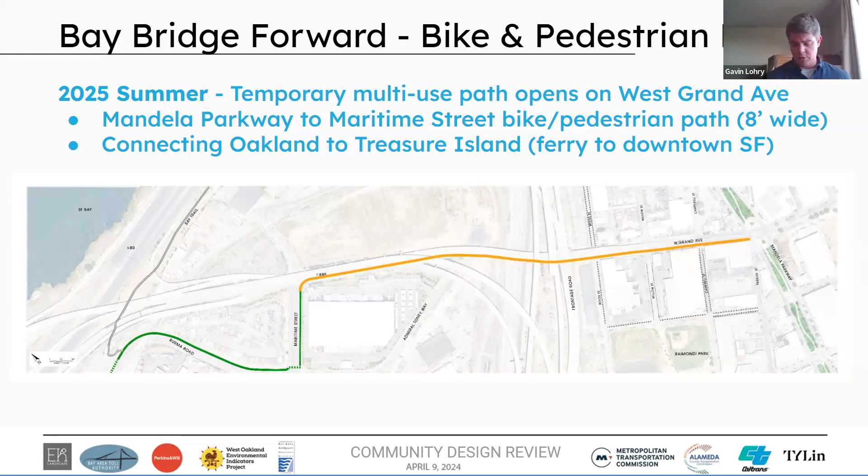So we're really excited that this will be the first kind of connection, and you'll be able to bike all the way over to Treasure Island. There is a current ferry there. It's not frequent, but there's a lot of amenities and parks there, and also access to go enjoy the Bay Trail.

So this is coming in summer of 2025. This will be followed by phase 1 of the Bay Skyway in 2028. This will be a mostly 15-foot wide path, and it will take over for most of the Bay Bridge Forward path. There will be a small area between Frontage Road and over the railroad tracks, as you can see here in yellow, that will maintain the 8-foot wide Bay Bridge Forward path for now.

But this will be a connection when this opens that you will be able to bike without having to cross traffic all the way from West Oakland to Treasure Island. And this will be for all ages and abilities. We really hope this is something people feel comfortable with.

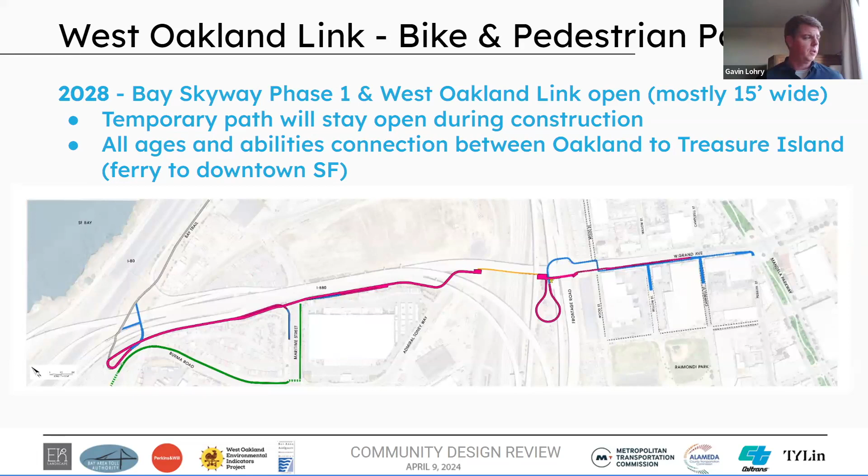Then, to complete this project, we're still working on the date of this. We are looking to complete an additional bridge over the railway to really open up the West Oakland link and make sure it's 15-foot wide the whole time. This is going to have to be a separate project, and it's going to be dependent on going through the project approval process and getting funding.

So today, really, as Nicole mentioned, we're at 35% design. We're really excited to come back trying to integrate some of the feedback we heard last fall. We had 5 great meetings last fall and winter. And so really now we're trying to bring to you the updated design as we move through the design.

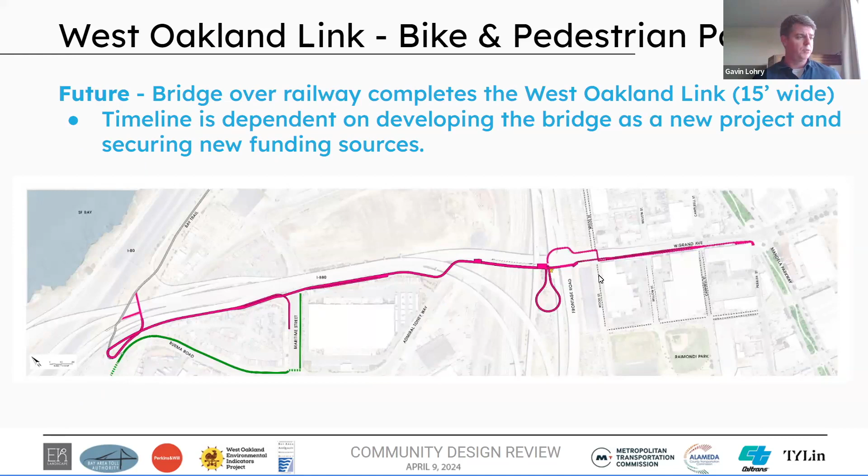So one thing to keep in mind, and I know I mentioned this if you were at previous meetings, is the way that design and community engagement works: the earlier in the design you are, the more impact that feedback has on the larger elements. So before, we were taking feedback and we were still working on the structure and exactly where it would go. We were able to add a great loop that will allow us to never close down the path connection, and also increases access from Wood Street. So we're really excited about that. But as we move through the design, we have to start choosing different structure types and things like that.

And now we're moving on to more of the amenities and some of how things look. We'll get to vegetation and colors, but these are the things that we're working on now. So really the structure and where the path is going has been locked in, but we're excited to keep on building on the design with your feedback.

So we're going to cover a little bit of the context where we just did, and go through some of the neighborhood context and feedback we received. Then we're going to look at the structure itself and some of the different design options we're looking at. Just to say that the color we've chosen, fuchsia, is not the final color. That is still being developed, but we're using it to show as an example.

So after we look at the structure, we'll look at the ground plane and things that are happening on the ground, because we've opened up a number of areas where we think we can make improvements to the community. We'll take questions after that, and then we're going to get into the Frontage Road loop. This is the additional entrance we've created on Wood Street, and then where it touches down to the Bay Trail, before taking questions.

So without further ado, I'm going to hand it over to the design staff.

Awesome. Thank you, Gavin. This is Sarah Kuehl with Einwiller Kuehl. You've been hearing a lot from Geo Maine on this project, and they are under the weather with a fever, so I'm going to do the talking. But I want to say this is the work of a much larger team at our office and TY Lin and elsewhere, so always a collaboration among us and also with the community.

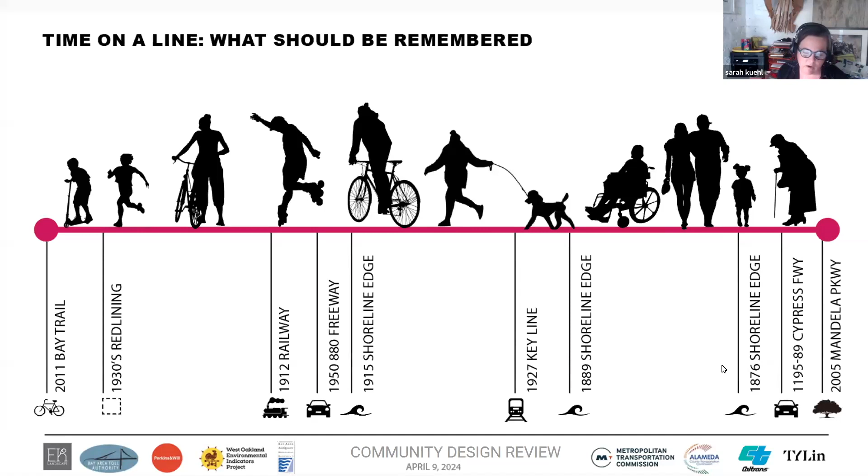Some of the history that we've identified, you can see here. At different moments, there's railroad history, there's amazing history of the Key system, the Shoreline Edge, the Cypress Freeway, and also the work that WOEIP is doing today, and redlining in the past. So there's a whole bunch of things, and they actually have a particular location on this path that we could call attention to with storytelling as part of the project.

In a series of preliminary conversations with community, we've identified some stories. There's going to be a longer effort to think more deeply about these stories and how to represent them and how to tell them. But we know that there's more than one era that's important. There's ecology that's important, there's history that's really important. And if we can put that all together, it's a very narrow project, but it's kind of an amazing project in terms of all the things it has the potential to connect and hold in one space.

We've been talking to the community a lot, and we've had a lot of different meetings. I think we really welcome the opportunity to talk so directly over and over again with WOEIP's assistance. The community is excited about the project and also very pragmatic. Top concerns are things like safety, ADA accessibility, picnic tables and seating. There's a hope for more green space, mitigating sound, and so we're working on all of these things. Sometimes it's a person with a really loud voice, and maybe that looks like they get the most things, but there might be a good idea that only one person had, and we'll try to work that in too.

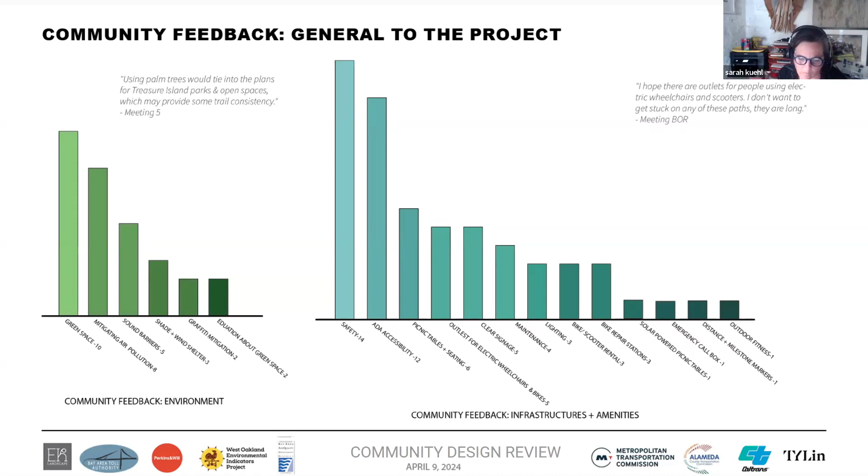So we're trying to take feedback at all different scales and use all of this to put the project together into a whole that doesn't feel like it was made up of a bunch of things, but is really symbolic of this gesture of connecting the neighborhood and the Bay and the rest of the Bay Area. I'm going to come back later and talk more about the on-the-ground pieces, but I'm going to pass it to Noel to talk about the bridge and the on-structure element, which I think is really exciting.

Thanks so much, Sarah. Hi everybody, excited to be here. My name is Noel Shamble, I'm our lead bridge architect here at TY Lin. I get the great pleasure of working on this project and with this exciting team. We've had a lot of fun trying to incorporate as much of that great feedback that Sarah just touched on into this long and complex project as we can.

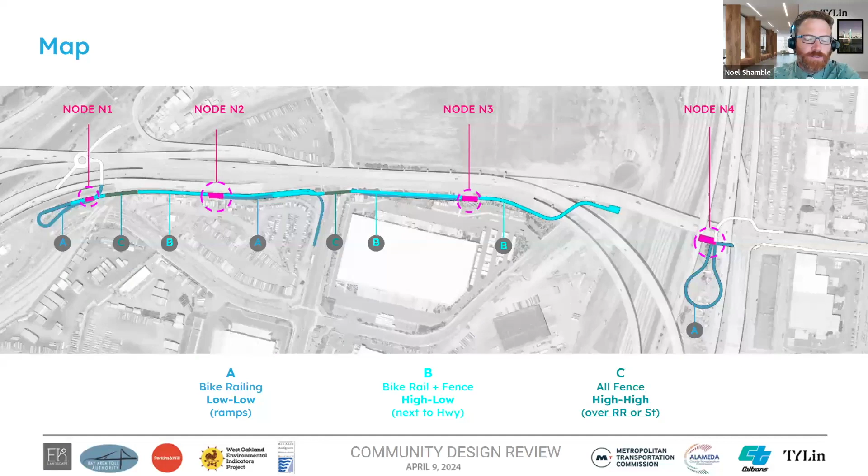So here's a quick overview of the part of the project I'm going to touch on, which is, as Sarah mentioned, the bridge component. Anything that's elevated is highlighted here in the blue and green colors. We'll dig into the depth of that later on, but I want to focus here on the pink as well. Along a big corridor like this, we've found it important to create little rest stops or periods of pause, maybe a natural place where ramp connections are coming together with the main pathway.

So we're calling those nodes. You might call them rest areas or things like that, but they're little areas where the pathway is a little bit wider. We've expanded it a little bit, and we're going to focus a lot of our design efforts on implementing great extra features in these areas, because we feel like we'll get the most bang for our buck in those zones.

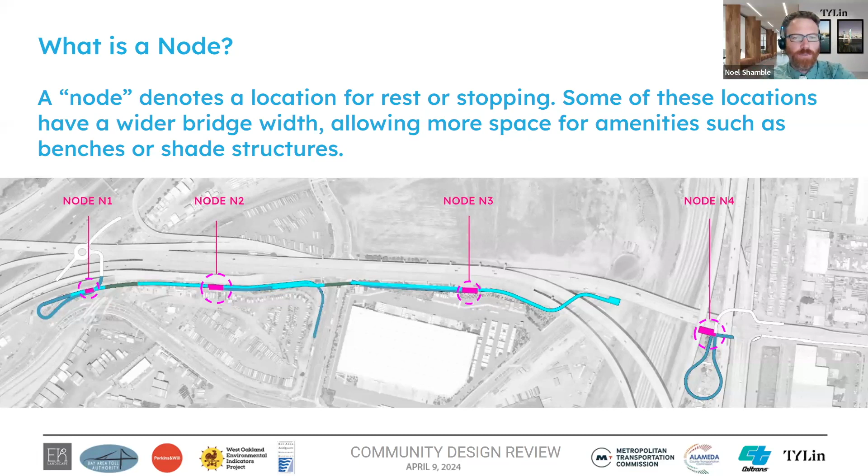So I'm going to go through about 6 different topics here: sound barriers, light, shade, deck color and treatment, amenities, and finally railings.

First off, we have sound barriers. These are sound mitigation measures that we hope, in these areas where people are slowing down and taking in the view, having a little bit of rest, we might also provide a little bit of respite from the noise of the roads around them. These would be on the northern side of the pathway, buffering that sound.

The idea here is that this is a transparent system. As with all of our design, we're trying to emphasize transparency to enhance the sense of safety and openness of the project. On nodes 1, 2, and 3, we're conceptualizing a sound wall here.

If you go to the next slide, please, you can see what that might look like, where the fencing stops and instead we have a transparent paneling system.

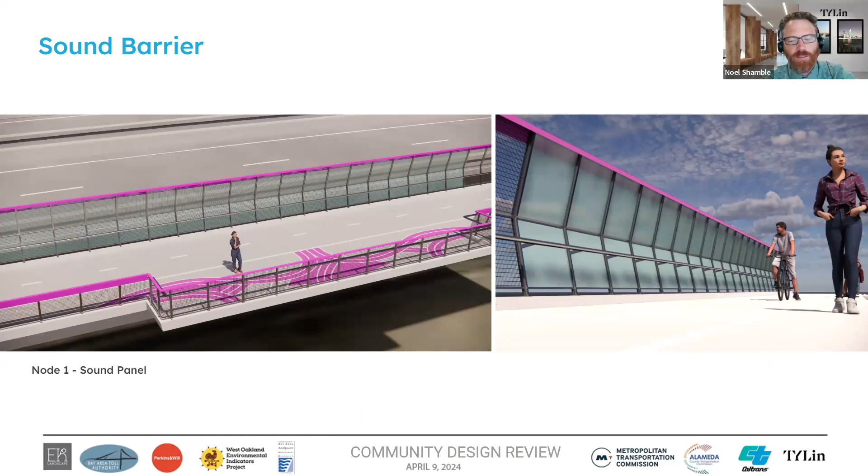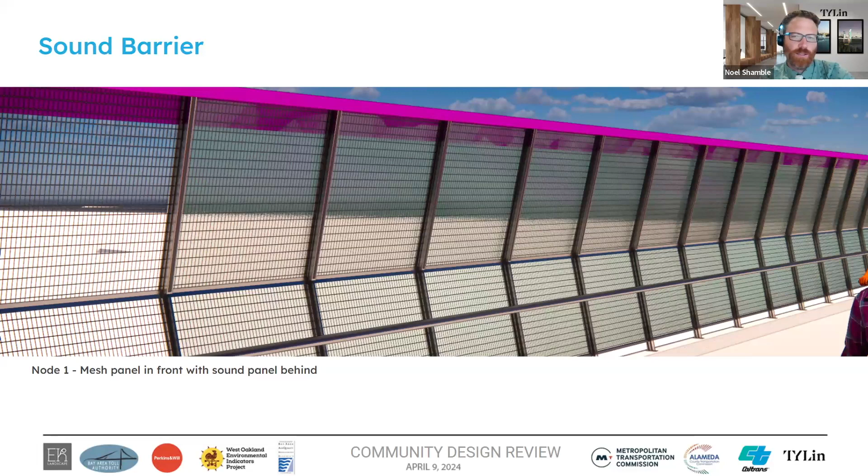If you go to the next slide, we're looking at different ways we could prevent vandalism of this. We know that's a key concern in this area, but also just extending the lifespan of a product like this. So maybe partnering that with the fence meshing, offsetting things, or some other kind of relationship with that clear acrylic paneling is the idea here.

The next feature we're looking at is lighting. Lighting is really a two-parter. First and foremost, it's all about safety. One of the main things we want to ensure when doing safety is that we have light on people's faces, not just light of the ground plane, but light of the face coming towards you at night.

This will be continuously lit throughout the entire project corridor. Our suggestion here is that we have a vertical light pole that gives it a bit more of an artistic interpretation of a lighting system.

One of the main themes Sarah touched on earlier, that kept reoccurring in the feedback we were getting, was to try to make it a human space, a pedestrian space of a human scale, in contrast to the really vehicular and industrial heavy setting it's in. So we're trying to do little tweaks to what you might conventionally see in order to give it that extra artistic flavor.

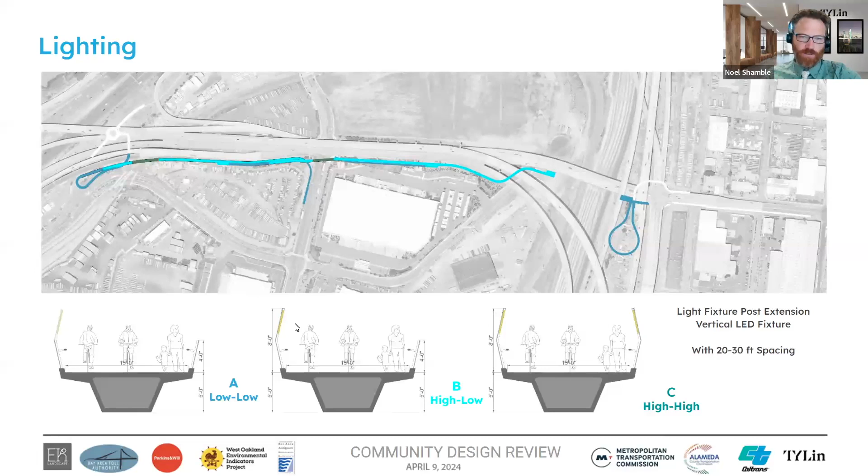So here, instead of light poles being horizontal, there'd be vertical. If you go to the next slide, you can see how that might look in these conceptualized images. This is an array of lighting that would continue the whole walkway and be integrated into the fence post system, whether that fence be low or high. That's something I'll touch on again later.

The lighting is LED, has great lifespan, very low energy consumption, great sustainability features. So it's a great product, not just for safety, but also for aesthetic concerns.

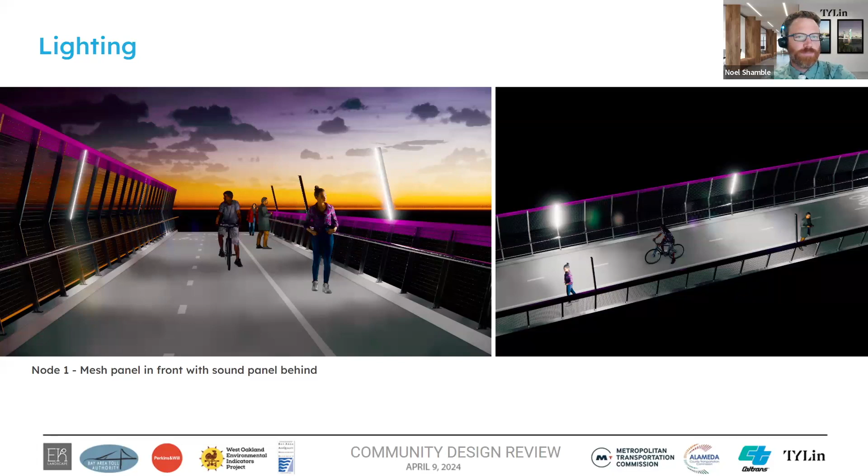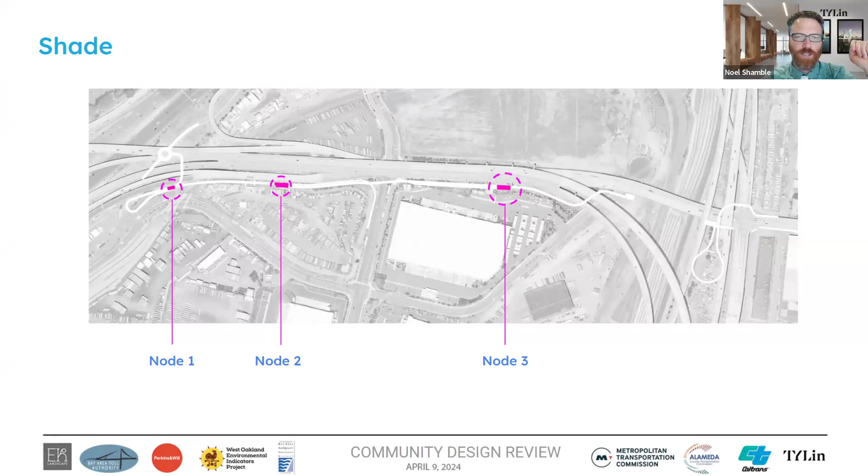Regarding shade, we also want to focus shade elements here on these node features. We had a few different options of how we might design a shade structure at those places, which varies based on what the actual condition of the node is, and how much space we have to play with.

Here's sort of 3 alternatives we have. The first, option A, is creating a band that folds up and over. This picks up on a bit of the color scheme of these horizontal ribbons that might be going along the top of the railing system. Again, like Gavin mentioned, the pink color here is totally a placeholder.

It's kind of diagrammatic. We hope to get your feedback on coloring and things like that. But you could see how the shade structure in this case would be integral into that colored ribbon of the design.

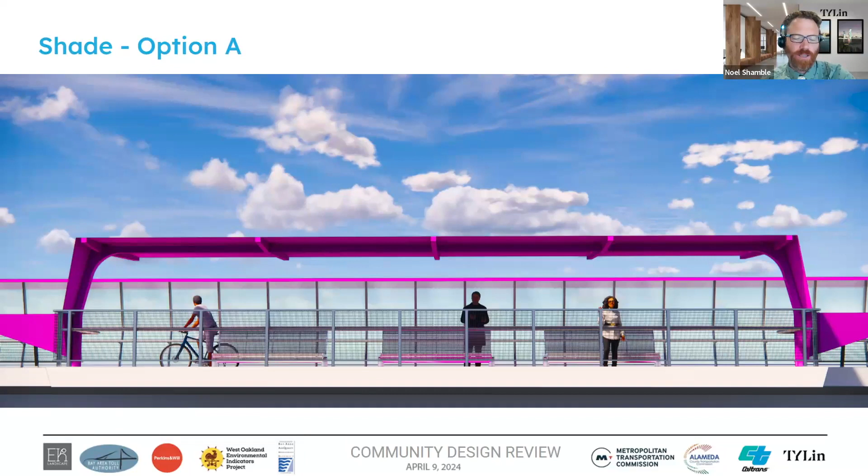And here you can kind of see other views of that, how it would pop up to really signify the overlook feature of that node system.

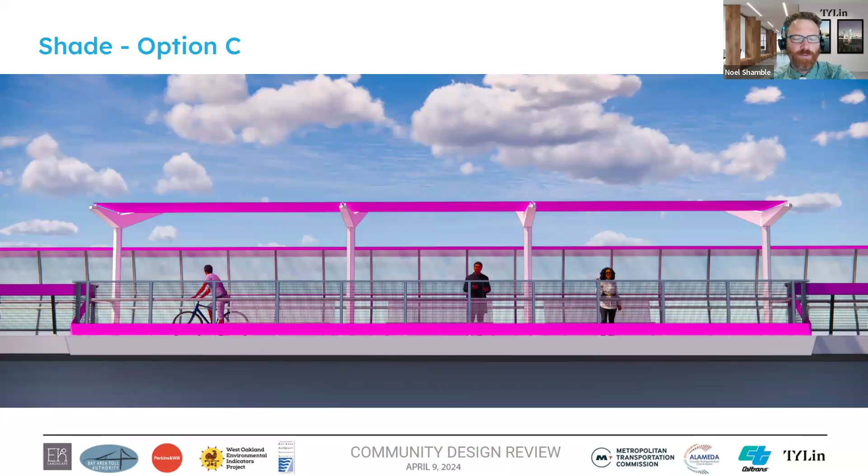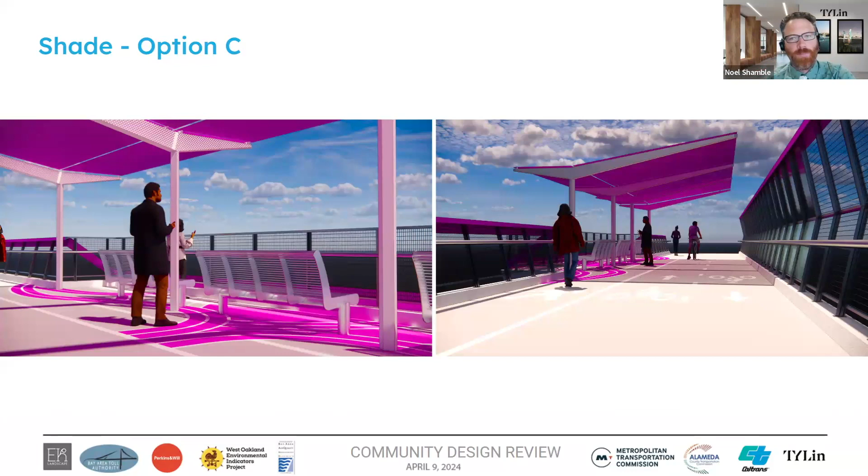Go to the next image there, you can see how that might look. This one, as with all I suppose, we've extended it a little bit further over the walkway, so it covers not just the overlook portion but also the pathway itself, creating a little bit more of an enclosed whole.

And the great sub-option of that variety is that we could maybe add a solar photovoltaic array to get a little bit of energy gain - maybe there'd be a charging station, or the bridge could have the feature of powering its own lighting system. So kind of give back to itself, give back to the community. That sort of aspect would be awesome.

And here's kind of again what that might look like, folding all the way over the walkway.

Now kind of going back to the deck treatment and the colors a little bit. The idea right now is that the deck, which is 15 feet wide throughout the entire bridge portion, would be separated into 3 parts. So we'd have about 2/3 for cyclists, who we think would be the main user group, with both directions for cycle travel, and the other 1/3 would be the pedestrian walking lane - kind of like a 5-5-5 split.

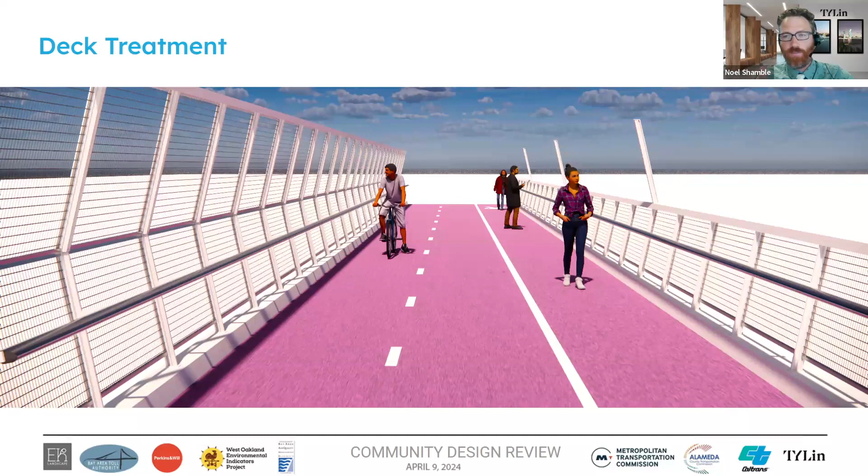And this image will appear conceptually throughout the other images you might see. It's a good way of diagrammatically showing the directionality of the project, and we think that would actually translate really well into reality as well. So it could be a great option.

And if you go to the next slide, there's some examples of some of these products we're looking at. It's loading - it's a little stuck. Oh no.

Imagine the best products you've ever seen. There we go. Okay. Yeah.

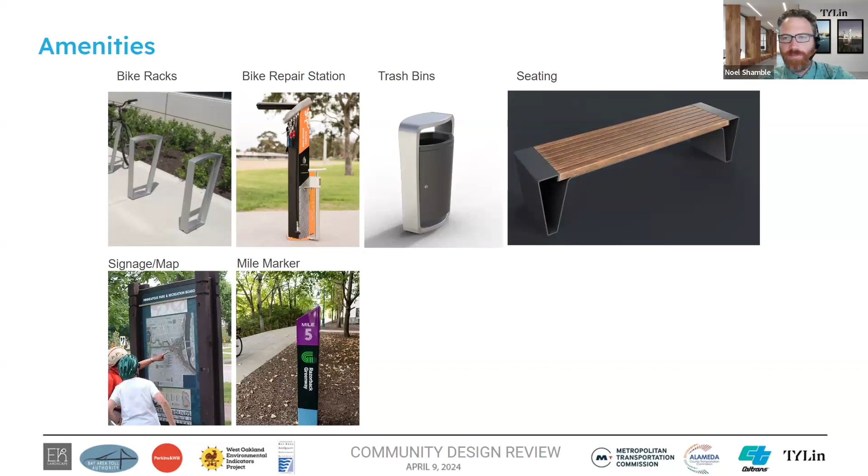We're thinking of this as a very contemporary design, so the products we'd be looking at for these features and amenities would match that contemporary feel of the overall bridge project. These would all be very low maintenance, bolted down, very safe and durable products that we're all very familiar with.

Lastly here, I want to touch on the railing types. Here we get back to the shades of blue map. There's a few different configurations of railings, and those configurations have to do with what sort of requirements we have in terms of what we're next to.

The darker blue you see on either end is signified by the A. That's where we don't have much around us, and we can use a lower railing, like a bike rail height, about 42 inches, a more conventional handrail height. But in cases where we're next to a roadway, we might have to have a taller fence per Caltrans code, so we might have a low fence on one side and a tall fence on the other.

That's condition B, which is the majority of the project here, sometimes called the high-low condition. Then in two places, condition C, where we're crossing over something that we know requires a high fence on either side.

Smack in the middle of the project, we have Maritime Street. We know we'd need a high fence on either side of that. And to the far west, we're crossing over a railroad track, so again we need a high fence there.

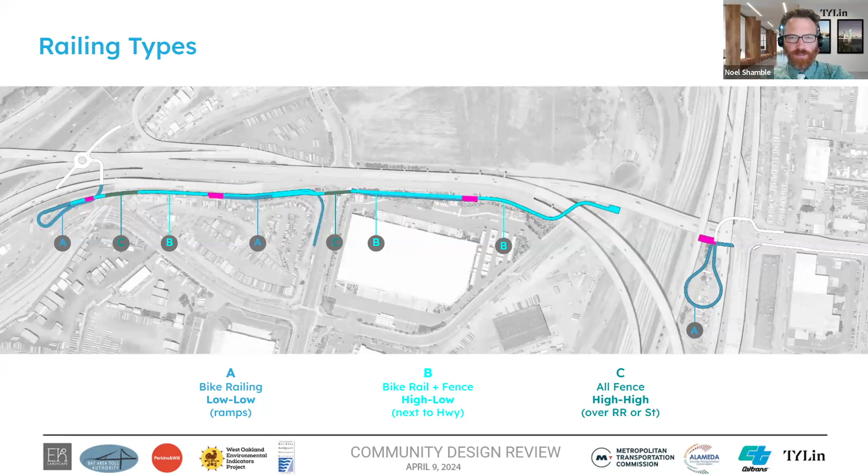So we wanted to design a railing system that would be convertible and flexible to adapt to these different conditions, regardless of whether it was high or low. It wouldn't look weird either way. This kind of angular system, which you've already seen before, is what we came up with.

The first idea is that we angle the rail posts outward to create an open and inviting situation at the lower handrail zones, making it feel as spacious as possible. But when the condition requires the 8-foot height maximum, the fence post comes back in to provide that safety and sense of enclosure.

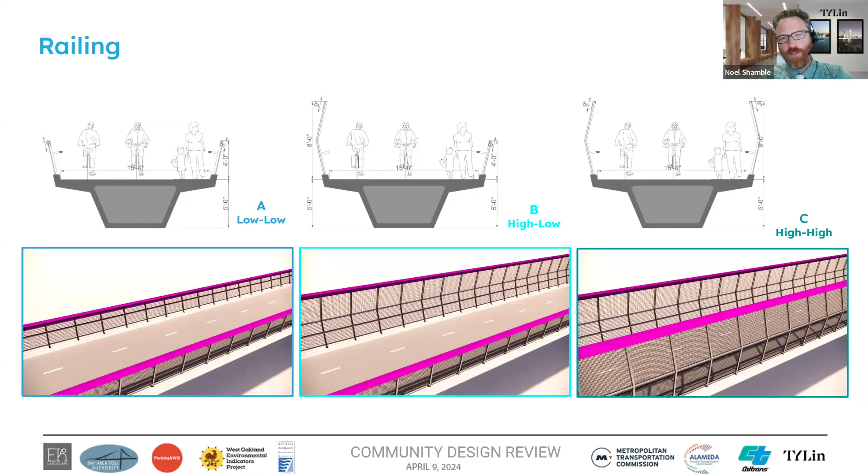So here we have, left to right, the low, the high-low, and the high-high condition. Here you can see some more 3D views of those. On the low railing type, this is more conventional handrail height, but you can see the light post fixture is still like an extended fence post, the same fence post you'd get on the high condition.

This is the low-high, where you have one of each on the left. And finally, for when we're crossing over those important arteries, you have the full enclosure.

I would stress, I designed bridges for a living for 15 years. A 15-foot wide walkway is very generous, above average. So even with an 8-foot fence on either side, this pathway is going to feel really great and open. Here's an example of that.

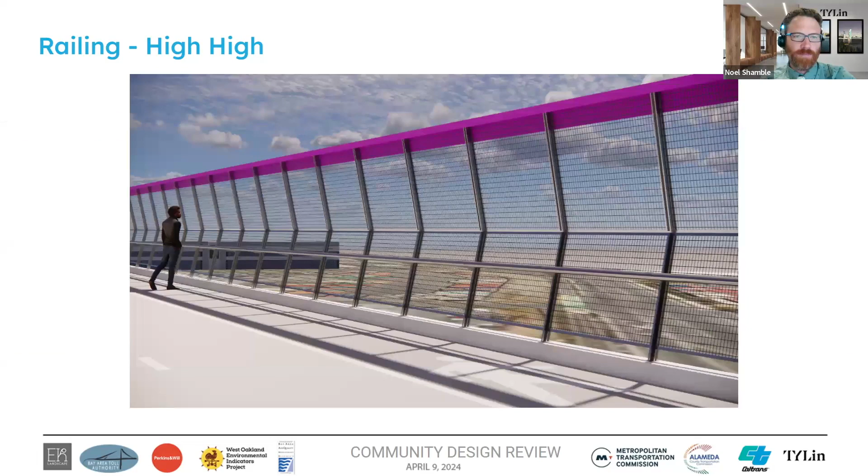Now, when we talk about railing, of course color comes up, and this will be the last topic I leave you with. You've noticed the colors have been alternating through these images, so that's something we want to throw to you for your feedback.

Here's an example of a white railing system throughout. This might pair well with, for example, color on the deck treatment, or putting color elsewhere in the project. Or maybe you prefer it just sleek and white like this. We did look at options where we're carrying this band of color.

You'll see later in the program Sarah will show you some great images of splashes of color happening in the landscape. So with the bridge, we want to think of ways we can carry that ribbon of color throughout the project and the corridor, knitting everything together holistically, while still enabling transparency in the railing system by strategically placing our bands of color.

So here we have bands of color at the top of each rail system. Again, it could be pink, could be anything.

Here's another variation: we're painting the band at the top, but also painting the mesh. It's a little tricky to see, it's a subtle difference, but over a longer area you start to pick up that color as well. And then finally, painting the rail posts themselves.

This really has the whole system become that ribbon of color, that holistic splash of life. Help us dial in what level is to your taste, and where you think the color or visual is most effective would be much appreciated.

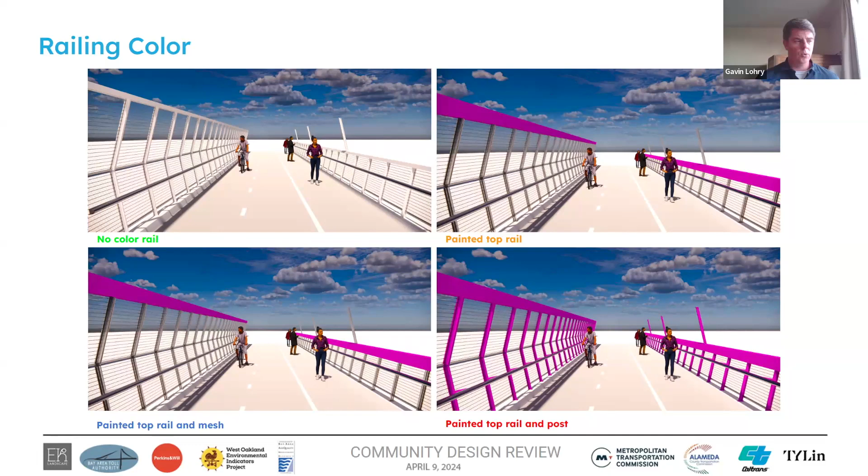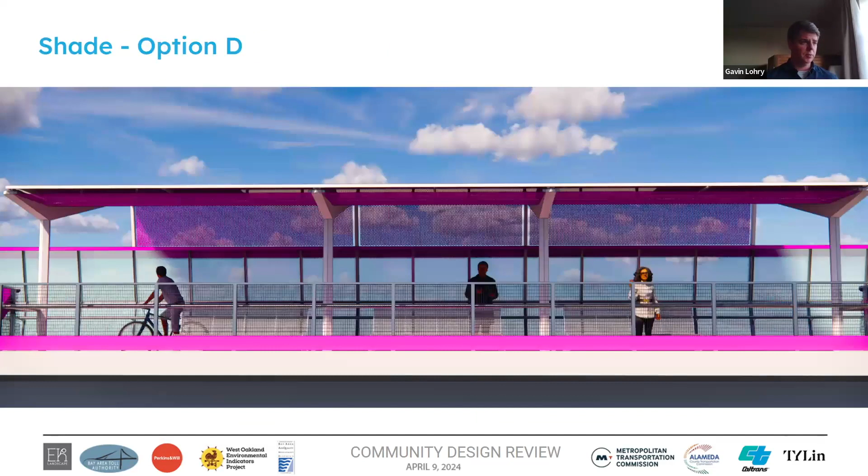Just on that point, Gavin, for charging, was that for on the structure or off the structure? So yeah, I think what we're talking about here is maybe if we went with the option of solar panels on the structure, the thinking was that if we did have this and were generating some power, maybe there's a way we could connect that with chargers. I don't know if we'd want a purely grid-attached charger, but the thinking is more about storing some and creating energy here. But like I said, if people have ideas or suggestions, we are still working through these details, so this is the time to give them to us.

I see. Okay, I guess on structure, thinking of the history of seeing where scooters are and whatnot in Oakland, there could be a chance for clutter and it could be harder for service people to get access to something that's on the structure. And just thinking of things being broken down and ultimately somebody has to get out there, but they don't, and kind of the rundown that could lead to.

Yeah, no, that's a really great point. That's helpful feedback.

Another question that was presented is whether or not there could be more than 4 nodes, or is that currently what we are working with?

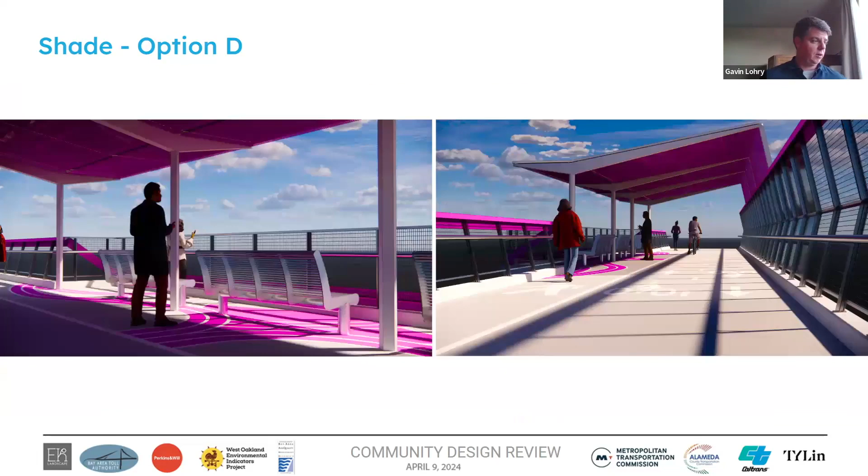I would say that the nodes you've seen here, let's see if we get to them. Really what we did with these is we tried to find the opportunity areas, where there was already something happening with the structure that allowed for relatively affordable addition of space to expand the structure. We can look if people think there should be more than this, and we want that feedback. There could be ways of doing it with smaller nodes even than these. So if that's something people are interested in, we'd like to know what those would be used for in your mind too, so that would help. But there would be an option. I don't think if we added nodes they'd be as large—they might be mini nodes with maybe just a bench or a sign or something like that, because we don't want to bloat the cost of the structure, since that takes away from other things we're able to do. So we're trying to keep it—I mean it's already quite a big structure for a multi-use path—but we could definitely look at it. So that's something we'd love to hear, if you think there should be more resting places.

And Gavin, if I could pile on there—the project is just about 1.1 miles, so if you imagine it's a 1 mile length, we're roughly looking at a node every quarter mile in terms of walking or biking. That's about a good pace we've found in other trail systems, especially considering the walking use, where you'd want to pause. Again, we're happy to look into adding more if you'd like us to.

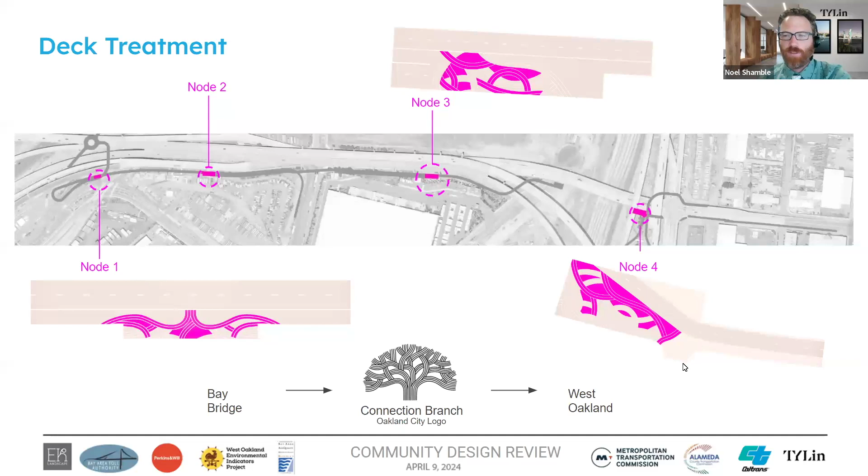Noel, last question, since you are here and the right person to ask: can you comment on the height of the railings and safety?

There's sort of a two-parter to that: there's a handrail height and there's a fence or railing height. Like I mentioned, we're at a low enough grade that you're technically not a ramp, so you technically don't need a handrail, but because we're inclining the railings out, you do want something to guide your walking along that curb edge. So we've provided a handrail, and a handrail height for a staircase or in a building is around 34 to 38 inches, and that's what we've shown here.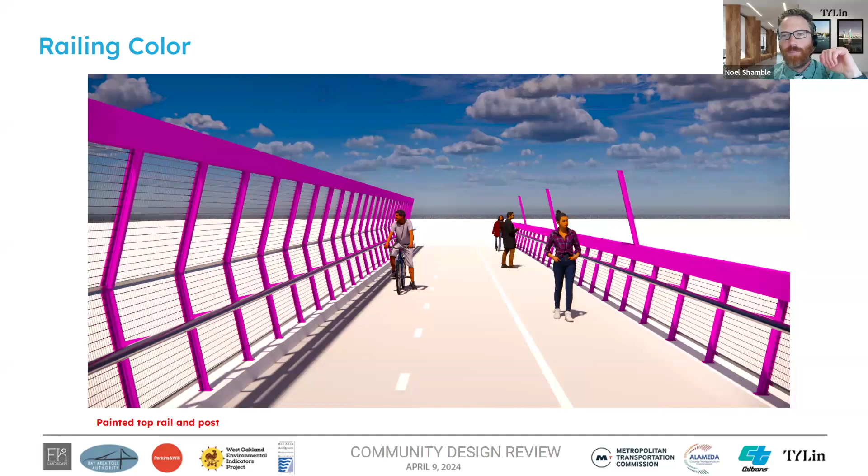On the left side, per Caltrans code requirements, the fence height is required to be 8 feet tall over any sort of facility, same with railroads. They also require a tight 1-inch mesh to prevent objects from being passed through the railing system—basically everyone's concerned about falling objects on the roadways below, and that's why they have those requirements.

Great, so I think we'll open up—we'll have two other question breaks, but I think we're going to pass it on to Sarah, who's going to talk about some of the off-structure ground plane. That's great, and I may be able to answer a few of these as we go. I'll do my best.

The biggest thing I want to say overall is this isn't an off-structure and on-structure project. We've been working really hard to make a trail, and the trail happens to be both on the ground and up in the air. What's important about the on-the-ground places is that it's where we're touching the ground of the neighborhood, touching into something that's already there. A lot of the comments you've had about being in right relationship and knowing where we are will be expressed in these proposals, which I'll walk through in more detail.

One question that came up was about sound. We've been in landscape architecture long enough that we actually own a decibel meter, so we took it out and took some measurements. It's not incredibly unsafe, but mostly above safe levels for park use, where you might be sitting on a bench for a long time. So we've been thinking about the space as providing some moments for gathering, but the real experience is about moving through the pretty awesome structures of the freeway, reconnecting to the views, not long-term lingering in most areas, although it happens in some.

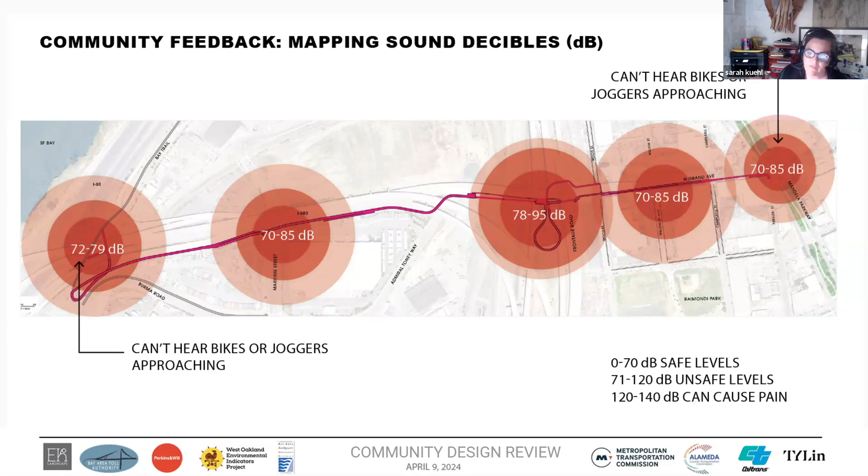We're also thinking about that as a design constraint, where it's important to cue to people who are maybe in cars or trucks, or other bikers or e-scooters, that there are people here and there's a lot of bikers. So it's got to do a bunch of things that are visual, and you'll see that coming through our design.

A great report that T.Y. Lin did looked at ways street art and painting the ground plane differently can signify to people that this isn't just a road for cars, actually reducing the rate of crashes with pedestrians and cyclists by 50%. It's pretty low-hanging fruit, and it's something that feels like it grows out of the artistic community here, which could also be the expression for a lot of different kinds of stories.

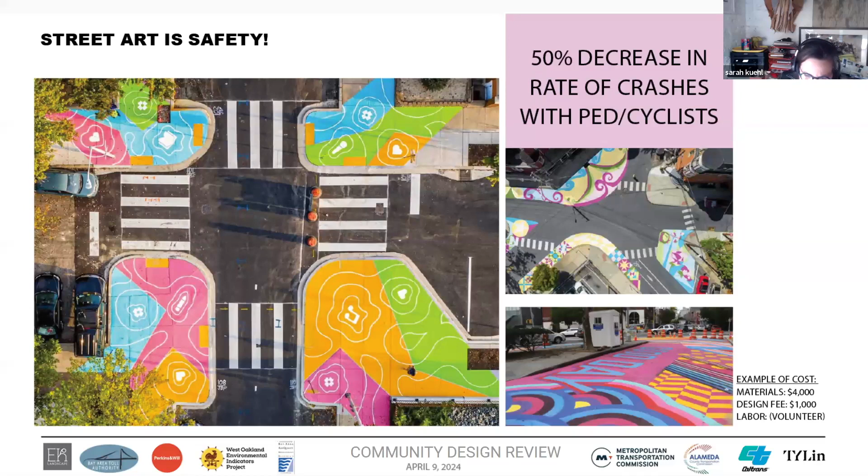We've also been looking at what design elements happening on the structure can happen off the structure, and vice versa—how can we bring things together. So there's furniture, like a bench, that would be the same one both on and off. We're interested in making human-scaled spaces with a kind of coziness, and lighting that's for people, not just for roadways. We want to make sure what we're making is in a color or other elements that make it different than the freeway. This is symbolically a place for people, an invitation into an area that's mostly been for cars, trains, and big-scaled infrastructure. This thing needs to be right-sized for our bodies.

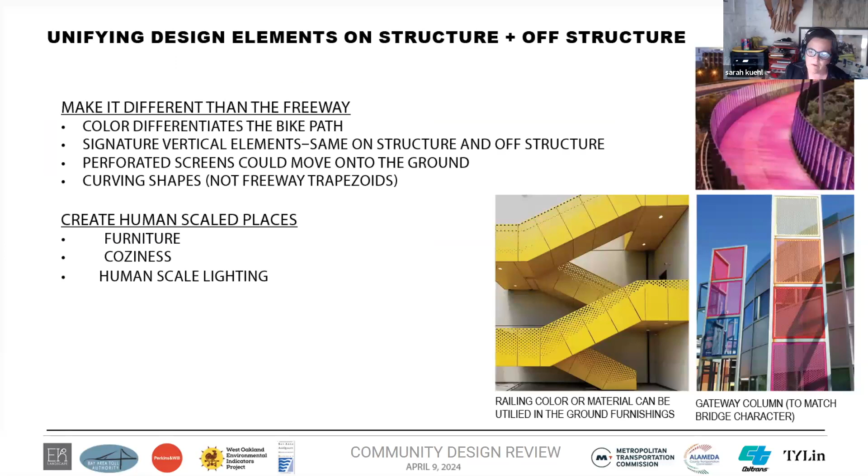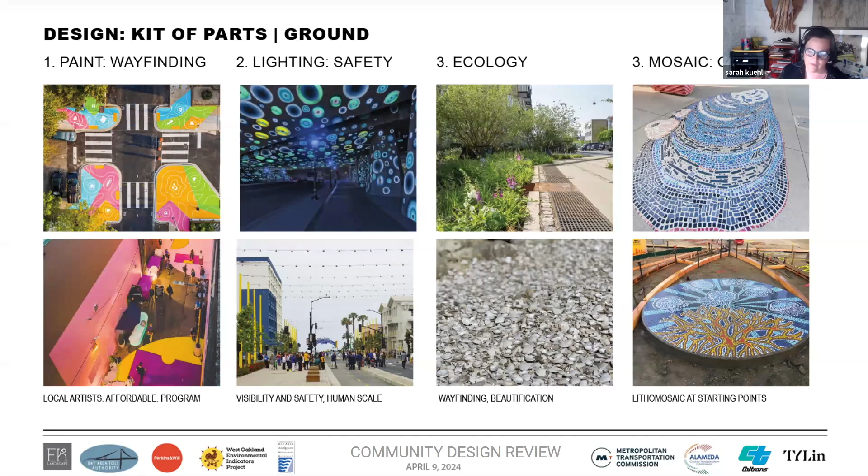Our design elements we want to be really strong and iconic, but also maintainable, durable, and straightforward. So we're using paint and color as one of our tools, applied to the ground, to walls, to other things. We're using lighting that can light surfaces but also make ceilings. We're trying to bring back a sense of ecology, meaning both planting and places where we can have permeability. And we have a signature element, a mosaic, which is very durable in the public realm but has a lot of bang for its buck in terms of color and expression. We'd work with local artists on a series of medallions that invite people into the project.

I'm going to walk you through the ground experiences starting at Mandela and West Grand, the easternmost point. We're looking at two options. On the right is the Bay Bridge Forward project, which will go first. At the corner of Peralta Studios, it has a fairly narrow sidewalk and a bike lane. On the left is a second option with more of a plaza at the corner, a shared space for all uses that doesn't split into a sidewalk and bike lane until a bit further west. Those are the main differences.

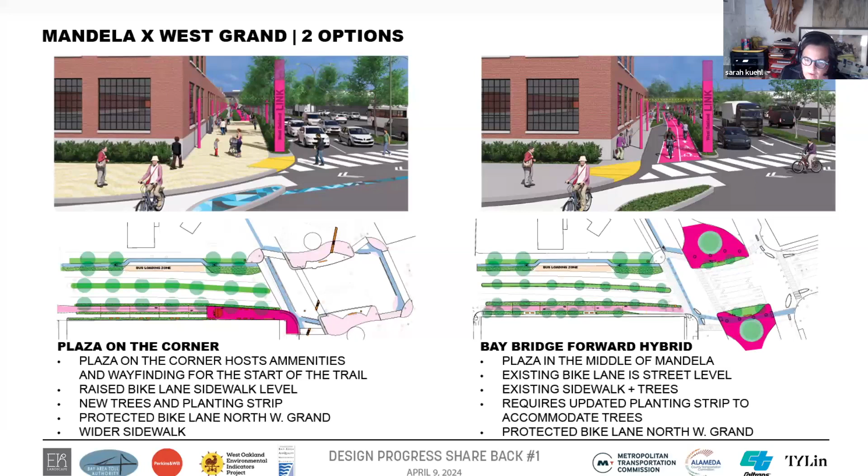The Mandela plan we prefer, and one we'd love your feedback on, is the one with the plaza, because it gives you a moment to pause and marks this corner, connecting with what's already happening in Mandela Parkway. The bus stop has been accommodated in this design. We like the idea of having space and as many canopy trees as possible, and maybe a way to mark the old shoreline in the ground, since it's remarkable that this was the water's edge long ago.

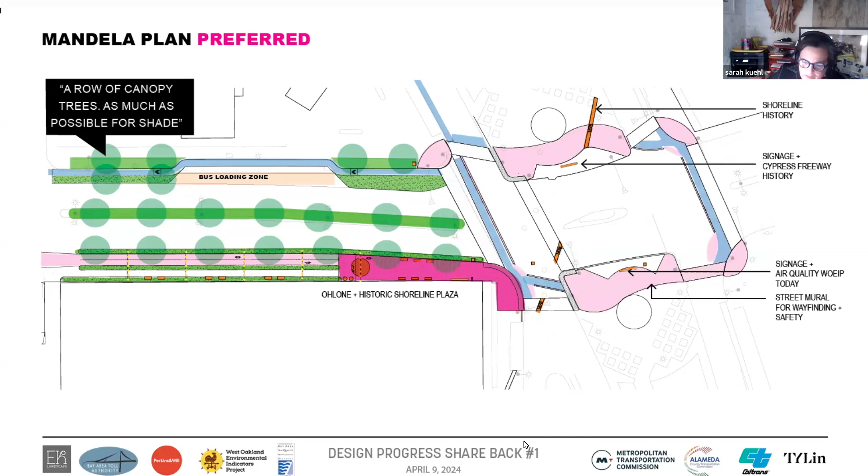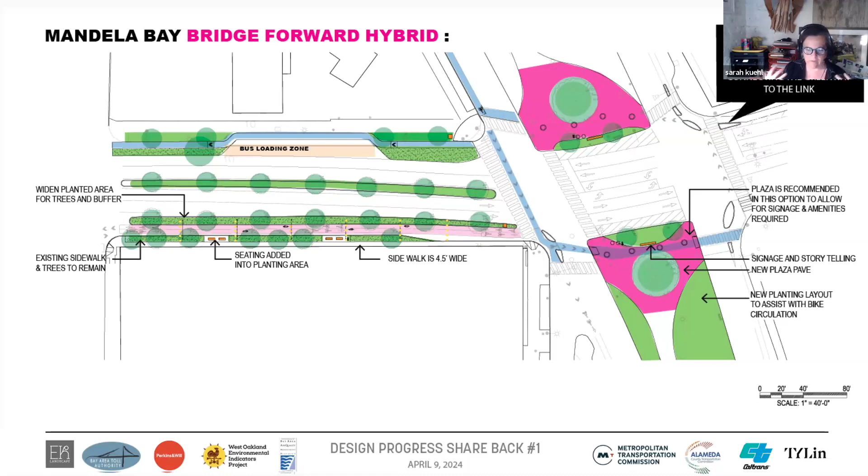The Bay Bridge Forward option is narrower and has seating. I think we can get a lot of the same qualities, but it doesn't really anchor you until you get all the way into Mandela Parkway onto those two plazas. In some ways, intuitively, the corner by Peralta Studios feels like a place where you can get your back up against something. It feels comfortable to be there.

These are some images to show what that might look like. This is from the center of Mandela Parkway, looking across towards Peralta Studios. You can see these pink pylons—again, they could be any color, and will need a lot more design time to find just the right thing. This one says 'We own our air,' kind of in honor of WOEIP and the work you all are doing—placemaking elements that help you know where you are. We span those across Grand Avenue too, to form a gateway moment, and you can see how that links across.

These are two more views of the same area, just to give you a sense. It's sometimes hard with plans to understand what it would actually be like to be there, so we wanted to give you views that are human scale, at eye level—what it feels like to be there walking around the plan as we'd actually experience it.

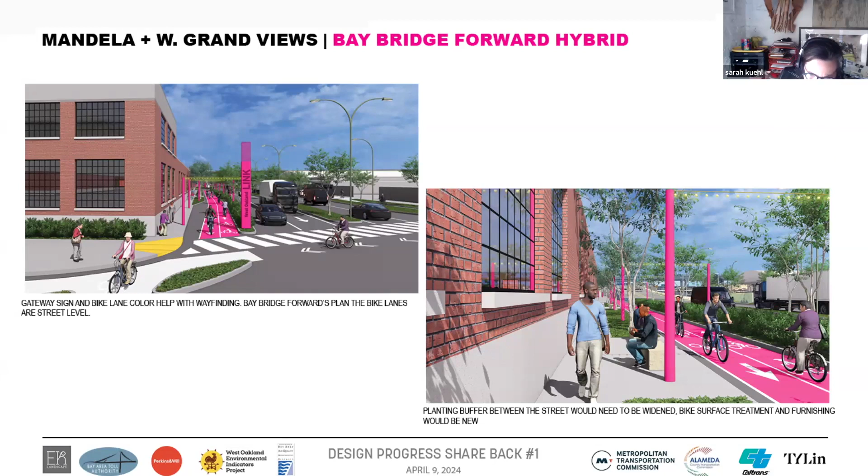This option shows the wider plaza, and you can see the width. It's very similar from this view, I think, but you get a feeling of how it works and the anchoring at that corner. It tells you it's a bit more of an invitation, is how I'd characterize it.

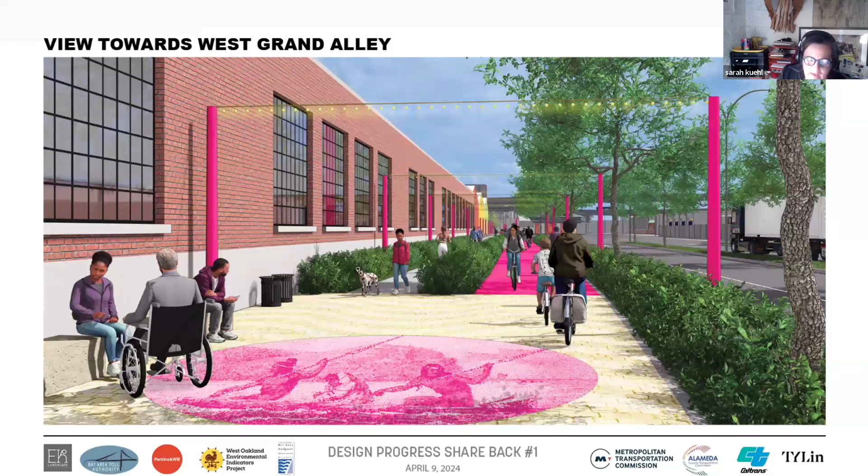A bit further to the west, the path is starting to split. The pink is a placeholder—a medallion talking about the history of the Ohlone people at the shoreline, which was in this location. It's also a way of telling people to meet at that point, a marker you can reference. You can see the protected, slower-moving pedestrian path on the left and the bike path on the right, with lights spanning across both.

This is showing you in more detail the dimensions for those of you who want to know how big it really is. You're seeing the 10-foot cycle track and a 6-foot pedestrian path with planting binding each one, and then the canopy trees on the south side of Grand. You're also seeing the protected bike lane on the right, although I think we have to update that.

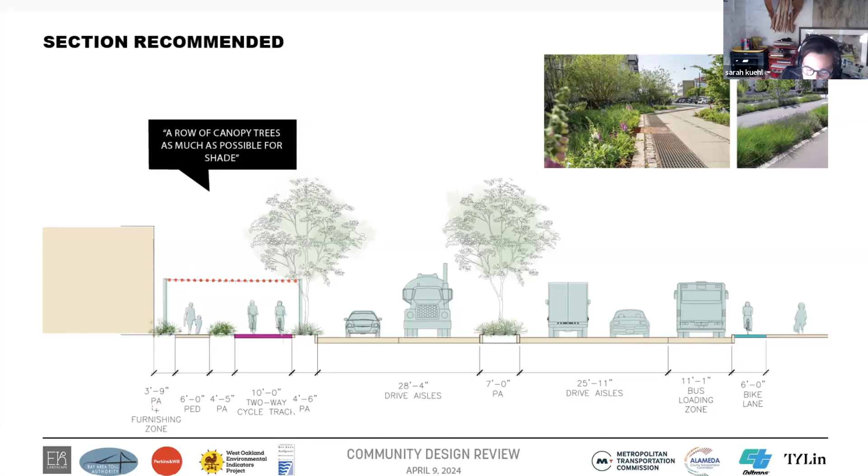As you traverse further west past Campbell and Willow, we run out of space to have a lot of additional street trees, so we've added some of those in both Campbell and Willow Street. There's greening happening where it can in this case.

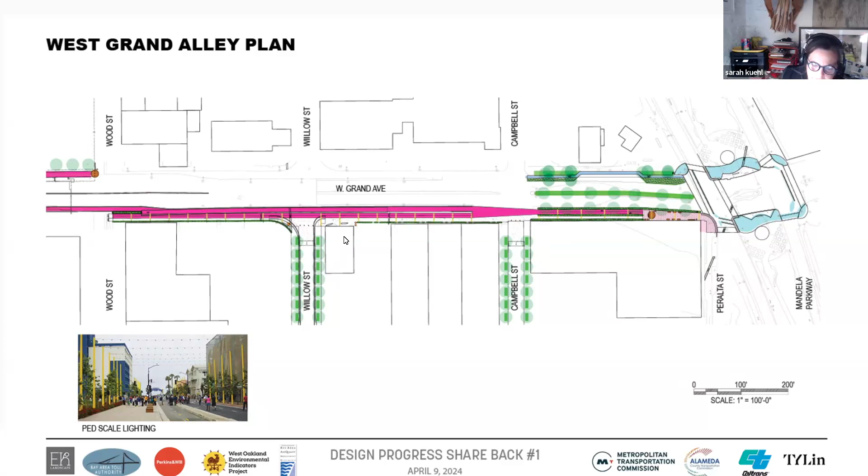You can kind of see here, I think this is an important one in section to understand, where there would be a bike path north of Grand. There's also a path on the structure, in the space of the sidewalk now, and then the alley path on the left. What you can see is the dimension and feeling of that 20 feet, which is different when it has walls on it and gets you a feeling. You're also starting to see that we're closing the space under the freeway from this side just to give more definition and quality, and I'll show you more what that looks like.

We think one of the biggest tools in this area is lighting, both for making scale and making a ceiling, and also for safety.

This is one of those spots where we think there's already a food truck that comes here that could be a place that gives you just enough space where people coming by could use the food truck. There's also people who are already stopping here. It gives you just a little space to be, so you're not sitting on a curb or something.

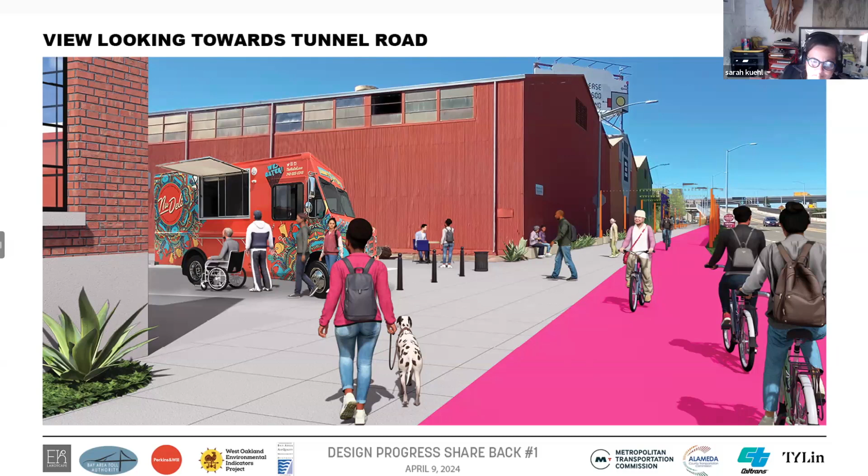One of the areas we're also most interested in getting feedback about is there's a space underneath West Grand to the east of Wood Street. For orientation, at the bottom left of the page there's a new modular building that just went up called 2121 Wood Street. This is across Wood Street from there, underneath West Grand. People were really interested in safety, and Caltrans was actually open to the idea of activation.

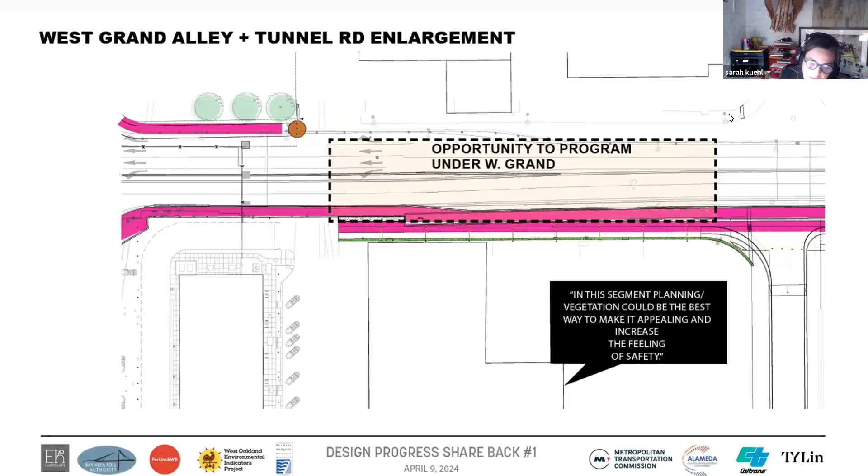One thing we've been talking about is whether or not there could be a larger art wall in this area and really change the feeling of the space by having some kind of art that's on the ground plane but that also went up the wall, which we think could be really powerful in terms of identity and placemaking. There's lots of precedents for it.

There are also some concerns about graffiti and maintenance, so we were also looking at a wall that would have a creeping fig or a vine on it that wouldn't have the same issues, and potentially would have more greening in that area behind the columns, as something that, since we can't have street trees, could be a real plus in terms of softening what it's like to be here.

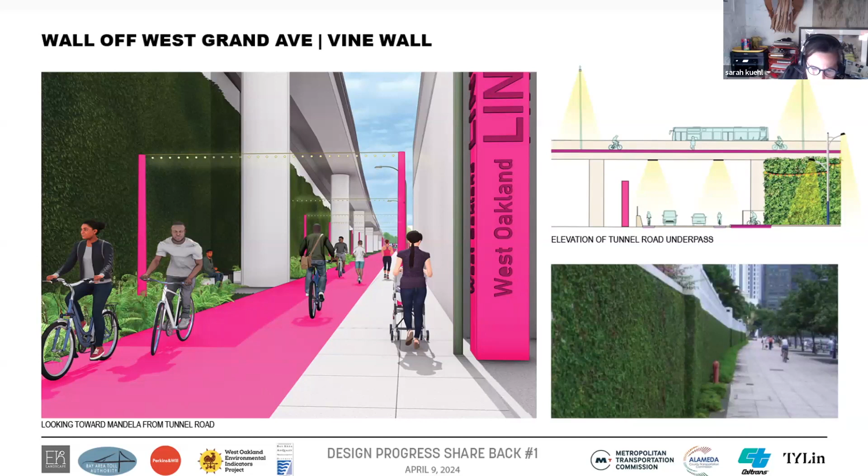As you get a little further on, you can see how we would let that wall give way to space underneath the structure. We're looking at a couple of different programs, one of which is an idea about a half-court basketball and some skate areas with lanterns. Roller skating is a really awesome thing we've worked into some of our programs. We also find it works great for little kids who like to scoot but aren't near a road, so they can do that safely. We want to design a space that really serves those things in a way that's fun and has a strong identity, and potentially we could light the ceiling and find ways to bring a strong identity to this place.

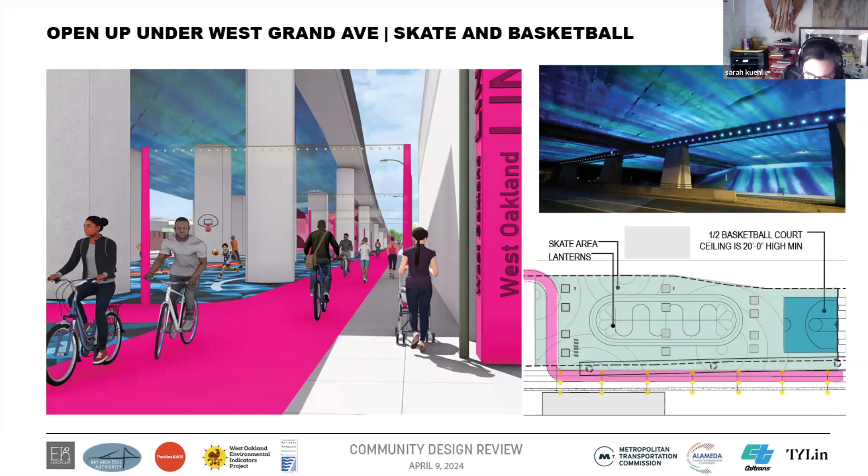Here are some views about what that might look like. You can see how we're using paint on the ground plane. I love the idea of a dance area. I think we're really open to ideas about what would make this feel really special, but also durable and practical. We just want to bring people here. We believe that if we bring people through to use this space, that's actually the best way to keep public space healthy.

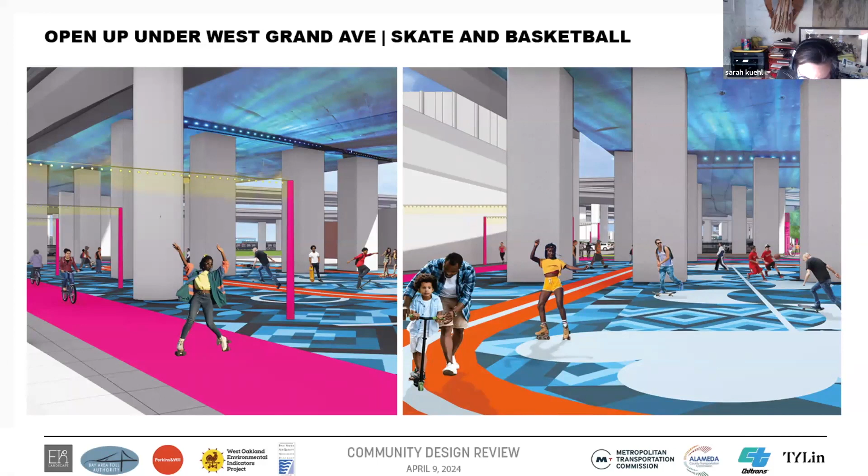That sounds good. I think there are more and more precedents for this all over America, and even in Oakland there are other precedents for people doing this. Especially things like dog parks are places where people really come and use them, and it can be a nice thing to have a dog run. It builds a kind of community of people.

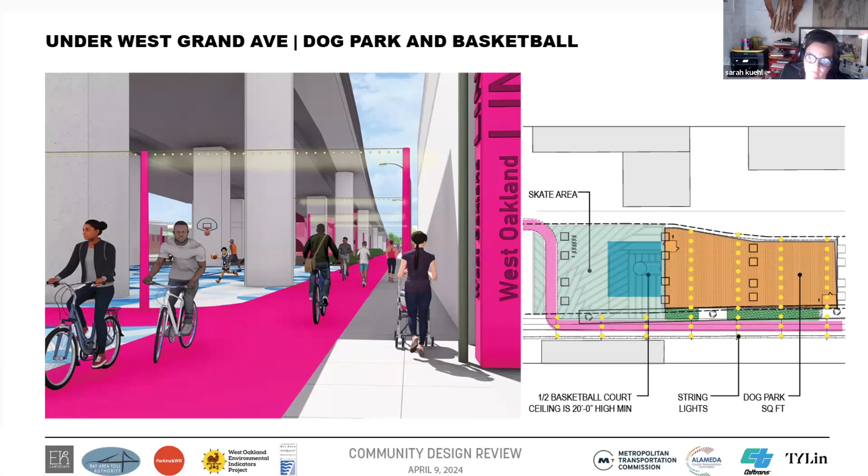So these are some views of what that could potentially look like here. You can see we're using those string lights and pulling them through this area, so there's a larger identity and an invitation to come underneath here.

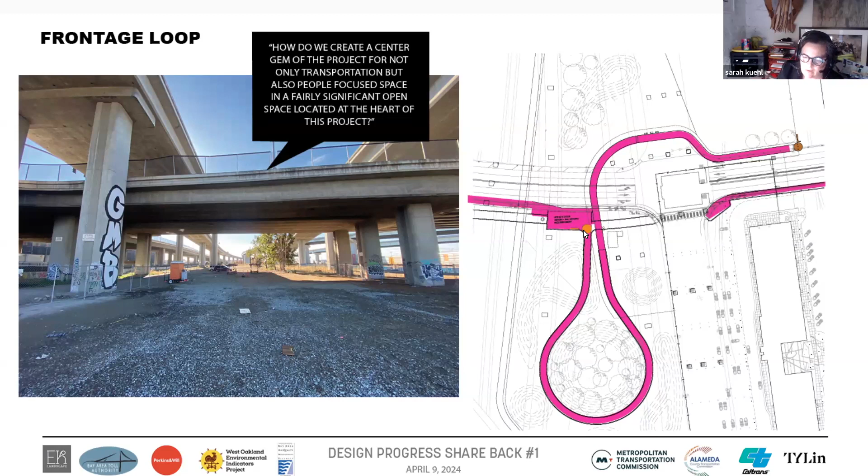There's already some planting and there can be more. So, a little bit of detail here - I showed you the 'where can we plant' slide. This is showing that in more detail, because this is one of the places where we have a big opportunity for trees. A long time ago we had looked at planting in this area, all along the freeway, and I'm excited to see this come back. You can see the little red squares and circles around the columns - there's a 10-foot offset at each column where you're not allowed to plant, so you can maintain the structures. We also have areas at the edges where we have to have lower planting, or there's private property, but we're looking at maximizing it where we can.

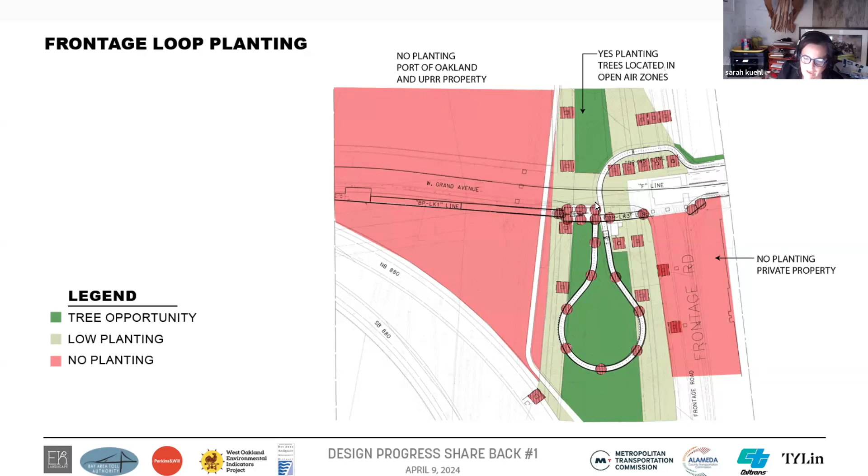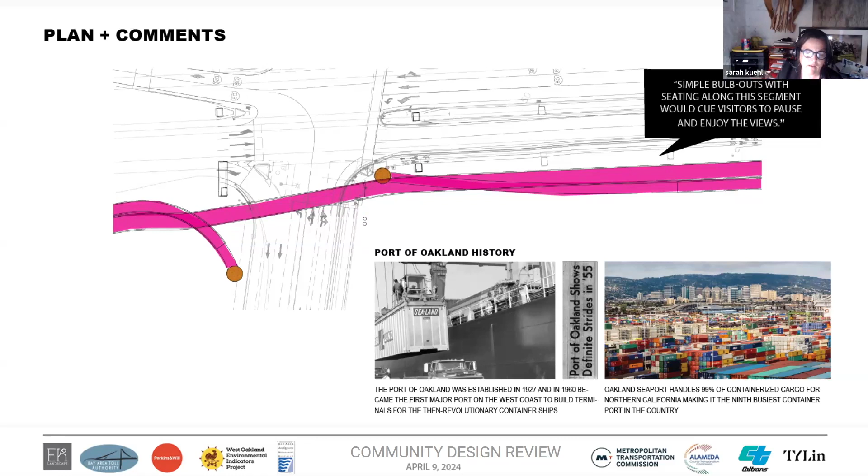Next slide. After you cross over and loop back around, you're really coming around, and you have a series of interesting views just because you're moving in a 360-degree way through space. You get the best tall, high-up-in-the-air view, and then you turn and come around and land on the existing Bay Bridge bike path. We've decided that's a really important moment - it's kind of the anchor. If we have the plaza at the Mandela end, we have a plaza at this end too, and it's the invitation to anyone on the bike path to West Oakland. We're thinking about using a pavement pattern, lighting, and other things to mark this moment as an important place, and also to have seating. To make it really clear in terms of wayfinding, it's also one of the places - we have them at a number of spots - with a water fountain, emergency call boxes, and bike racks. It's a pause, like a rest stop along the way. Next slide.

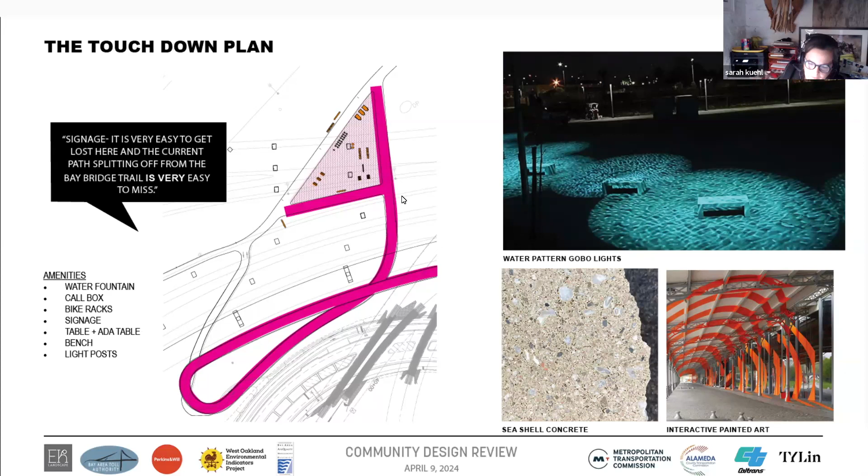So this is a view at the touchdown. If you look on the right-hand side, there's an existing bike path out to the Bay Bridge. You're seeing how we're making this triangle that has a series of lights and also these taller posts that could be art elements. We're slipping something underneath the freeway, almost symbolically.

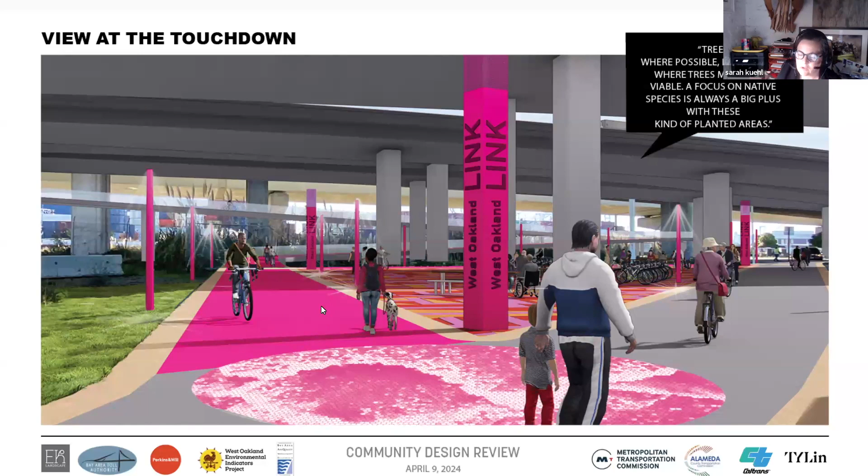What was here before that all of these posts have landed on? We think it could be a really great way to introduce, hey, if you want to get off, there's this amazing neighborhood over here for people who might not be going that way, but it's very exciting and becomes a really interesting, iconic moment at this point in the project. Next slide.

We have some constraints. We are going to do planting in this area as well, but we have some constraints because there are existing bioswales and other things where we can change plants, but we can't add trees, for example, but we're doing what we can. Next slide.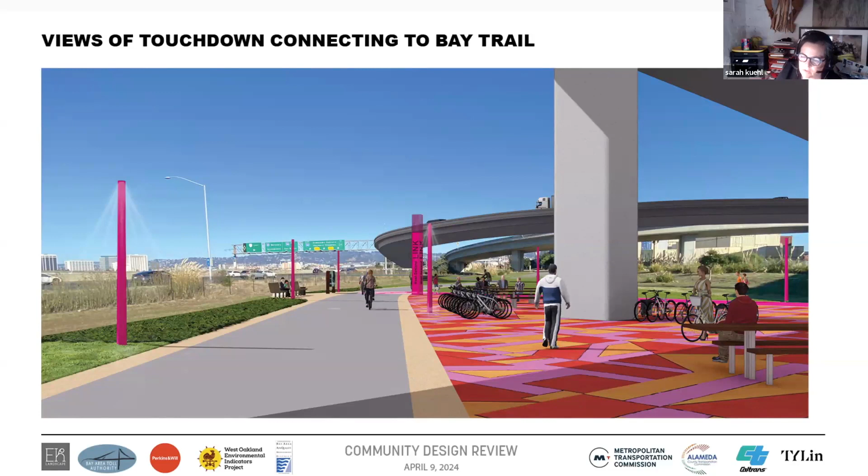This is an aerial view just to show you how this works. You can see the bike path we're talking about today coming in from the right and how it lands on the existing trail. But it also makes a place here, and it is a place that is very much about wayfinding and storytelling.

I think it's also very much about connection. When the original bike path was built, it didn't include a connection to West Oakland or to Oakland, and making this a celebration of that connection, as opposed to the most minimal way to do it, really feels good to me. I'm excited about what this could be within a very simple palette and a direct way of doing things. Next slide.

Actually, go back and then we'll take questions. But so, yeah, I'll just close by saying I've actually been working on this project for a really long time, and I'm just super excited to see it becoming more and more real. I think we're approaching a palette that is almost approvable by Caltrans. We're getting very close, and we're working on all the questions you guys have been asking us and trying to take community feedback, and would just welcome anything more people have to offer.

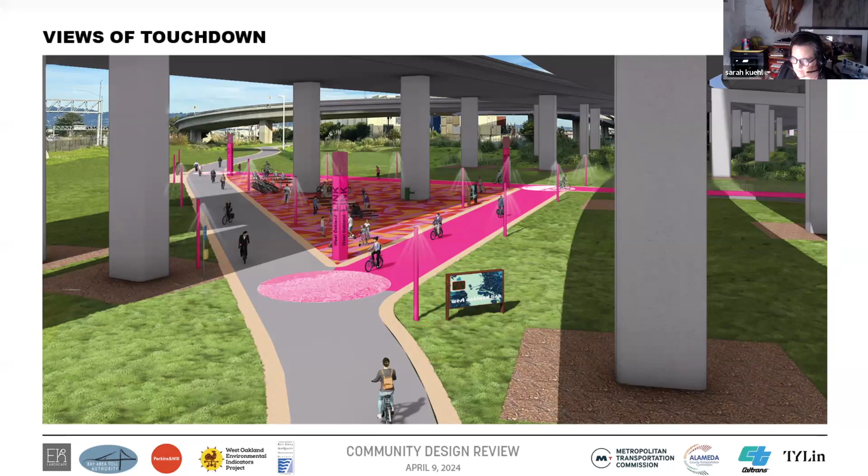I don't know if there already is a style guide from MTC. I think it's more jurisdictionally by local jurisdictions. I mean, the one that we do have is the Bay Trail guidelines, and that's being updated, and that is a little bit different here than there. This is part of the Bay Trail, so as we do the wayfinding, we'll be collaborating, making sure it matches the Bay Trail and other parts of the trail, the parts on Treasure Island and Yerba Buena Island.

So I think we're happy to share anything we've done here with other projects, and we do talk with them about whatever resources. But a lot of what we're doing here, especially this great engagement that the West Oakland Environmental Indicators Project has put together, is kind of a new model we're following on how to do this. So there will be lessons learned, and we can write about those at the end. We do hope this is successful so it can be a model.

Oh, and Marcus just shared the Walk This Way document. Very helpful, thank you. I saw Alexis's comment about Prescott Greening, which is a WOEIP project that starts on 7th and Frontage and runs through 16th and Frontage. I see her question is asking whether from Frontage Road 16th through West Grand, there was a way to combine the projects or deal with that gap.

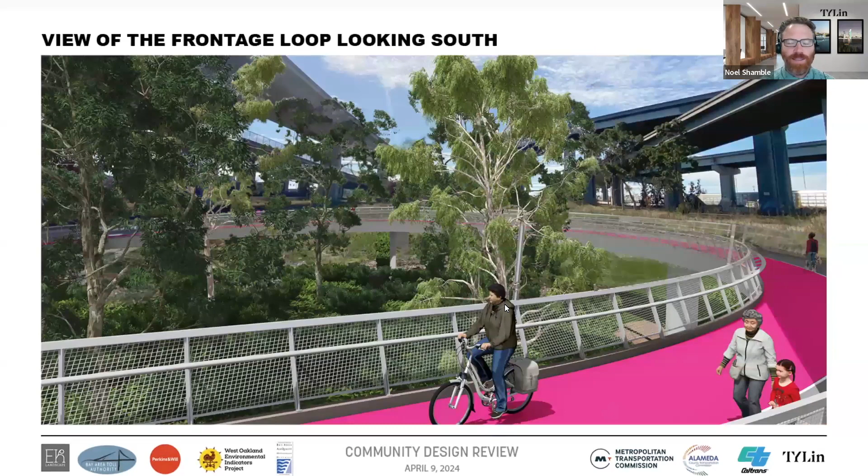There's a variety of ways to add color to a surface, and a lot of them make it more slippery. The one case where it doesn't is where they seed a top layer called lithocrete, kind of like sandy glass particles that are colored, and that goes into the wet concrete right as they're pouring it, coloring just that top layer and giving you a colored aggregate. So the actual texture, the grippiness of the surface, is what's colored, and that's proven to have longevity of color but also a great slip coefficient. It's not like you're just painting the top layer, which we all know gets very slippery.

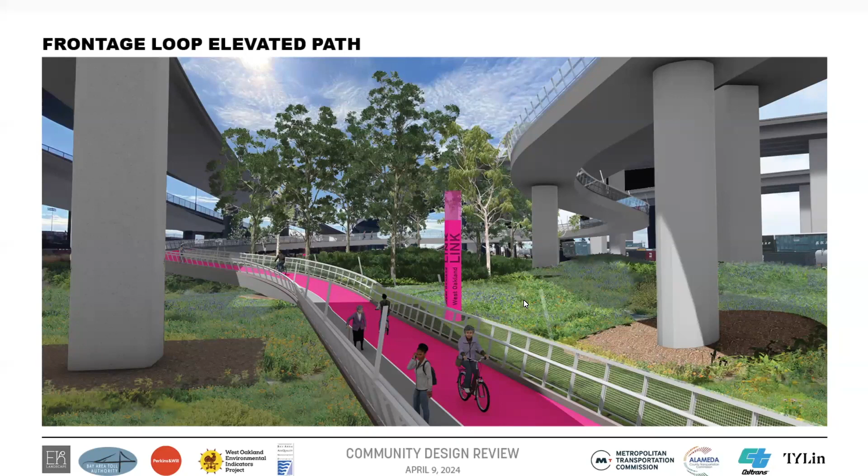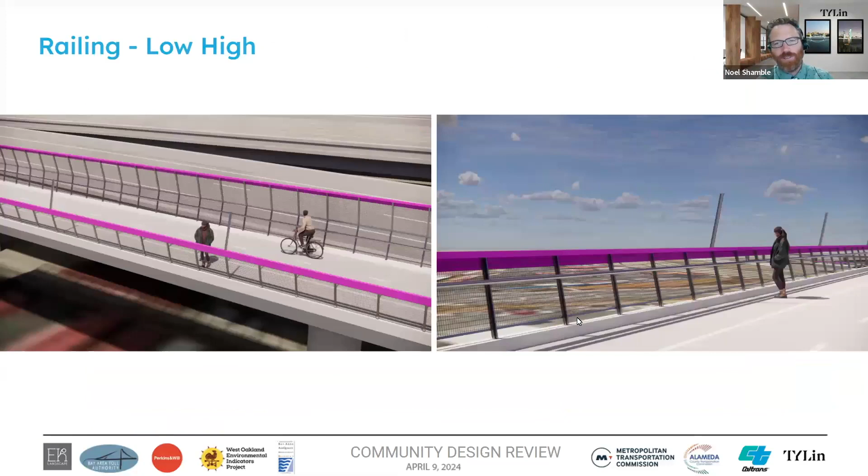Thanks. On the on-structure amenities with the bike racks, it makes sense to have them at the ends of the path, but on the structure, if there's a weighing of other options that might be better use. Locking a bike in the middle of the structure doesn't quite make sense—maybe putting in binoculars for kids to look down, like they have at the Middle Harbor Park. Our idea there would be not that you're stopping and going on an adventure from there, but that you just have a spot to rest your bike while you're sitting on the bench, having your sandwich, or using the binoculars—you have a spot to set your bike. Cool, makes sense. Thanks.

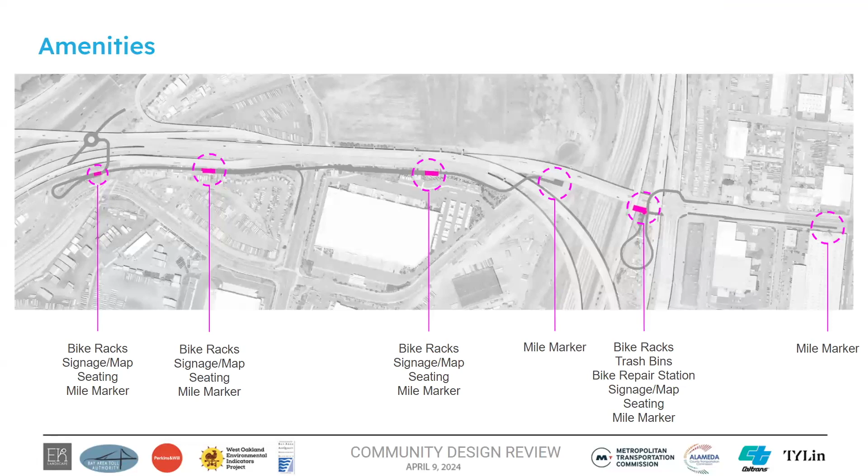There was a question specifically about how would cyclists and pedestrians access the link from frontage road. Okay, I'll take that here.

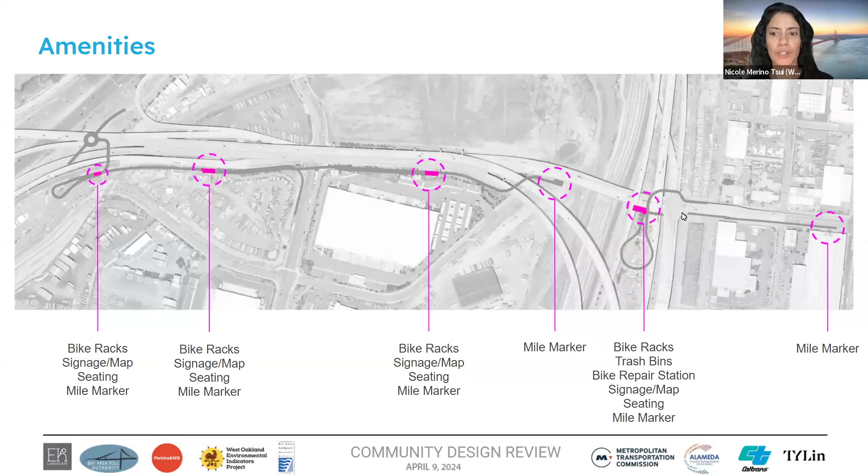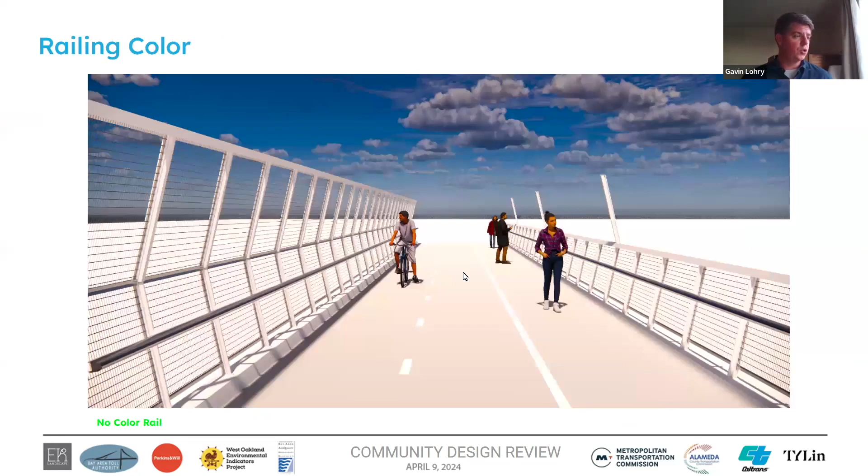If you were on frontage road, there are two paths to get up to the West Oakland link. There's this one we tend to focus on because of the sweeping views, with a lot of greenery, at the Wood Street entrance—this is the one we've been showing most. It will be 12 feet wide with a staircase you can walk up. There will also be a second way of accessing it, running parallel to Grand Avenue in the alleyway, which will be a 10-foot wide path. We don't think it will be as used because you still have to cross frontage road, and that's one thing we've heard a lot from the community—the desire to avoid frontage road. But there will be a secondary path that comes up here and goes to frontage road.

We'll create some more space here for people to gather if there's a lot of people. If you're going up frontage road using the existing sidewalk, you'll be able to walk up and use the same crosswalk with the enhanced intersection and enhanced pedestrian signal we'll put in. You'll be able to feed in from the south side of frontage road—I don't think anyone would come from the north side—and you'd be able to bike up. If a future bike lane is put on frontage road, you'd also be able to use that and cross over here, on structure, entering where people coming up Grand have come.

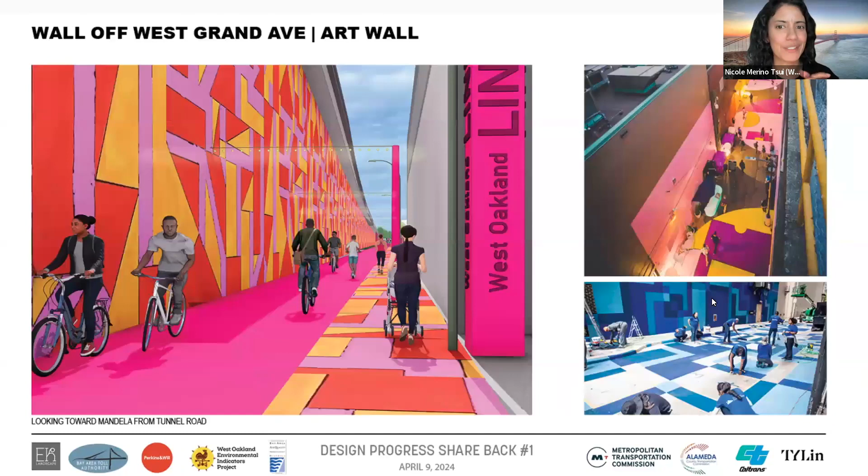Thank you everyone for coming. We are going to go out to the community meetings, we'll go to the farmers market, and we are looking for other opportunities. We've talked with the ballers—maybe there's a way for us to table at one of their games. So we're looking at those other opportunities because we want to reach as many people as possible.